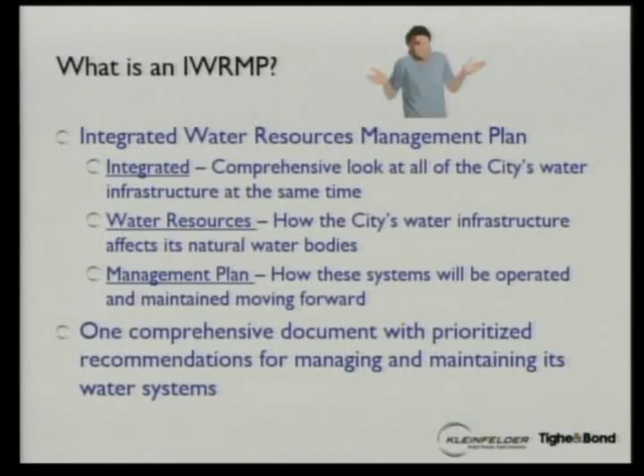So the water resources - again it's water infrastructure, but we're also looking at what are the critical natural water resources in the city, and a management plan. So this plan is going to lay out long-term maintenance, management, and capital projections for these three systems. That's really the goal. We'll summarize this in one comprehensive document. It'll essentially be a living document, a living capital plan that will need to be updated every so often, but it will be comprehensive. That's the key.

So what are the steps? Really, the top level steps are understanding the natural environment - what are the water resources - versus the built environment. What's the city's planning documents? What's the zoning look like? What's the commercial versus industrial versus residential mix, and in what areas? We need to understand that.

So we've done a lot of research and summarizing that - a needs analysis. We'll look at these systems and, based on certain factors, determine what they need. There's a lot of different factors. It's not just condition - condition's the obvious one in the room, but there's a lot of different competing factors that build into a needs analysis.

And once we understand the needs, we'll look at different alternatives for addressing those needs, ultimately coming up with recommendations that are integrated into a capital improvement plan. So I'll pause there for a second - that's a lot to take in, and I went through it pretty quickly. Are there any questions?

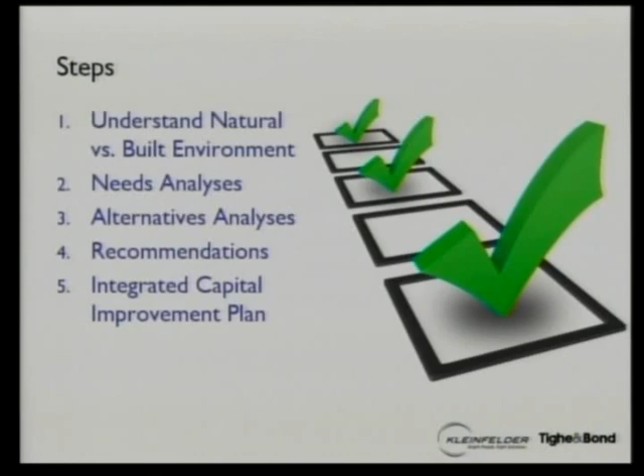Is there any... most of the eye contact I'm getting is pretty good and pretty positive, getting some head shakes, but if there are any misunderstandings or clarifications, now would be a good time. Nobody wants to go first, and that's fine.

Again, we'll be available to answer questions at the end. So, public participation - I do definitely appreciate everyone that is here tonight. It's a key part of this process.

As we're getting into the whole planning of this, in terms of scoping it with Joe, working with Joe several years ago, quite honestly thinking about this project and who it would affect and what it would entail - it's a pretty aggressive task, trying to incorporate all the different groups. We listed out all the groups that we felt might want to have some sort of input into this process, and it's a pretty long list.

And again, in order for this project to be successful long term, it's important that we raise the public awareness of what these needs are. Because at the end of the day, it's going to come down to spending money and how it's being spent. The more we can do to raise public awareness and understanding about that, the more successful ultimately the project will be.

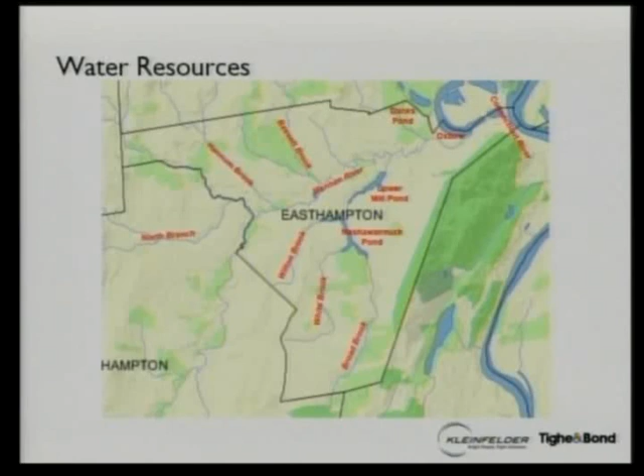Go ahead, Dave. And there's known water quality issues in many of these streams. That's no different than most towns across the state. And there's categories, so we're aware of those. That's kind of our first level of review, basically a desktop data review.

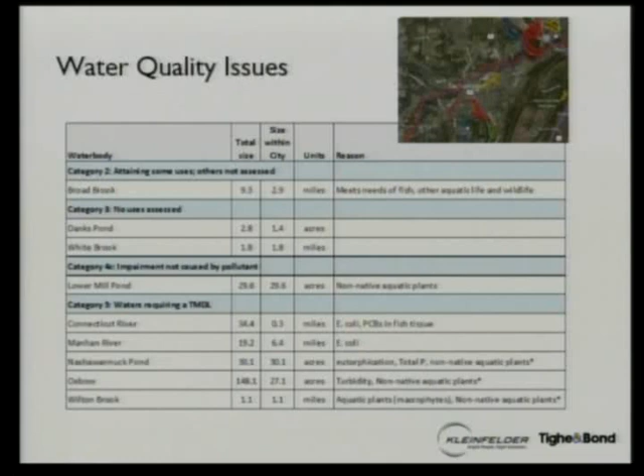When we get into the stormwater piece, we're going to look at watershed management and really look at each catchment area and prioritize those catchment areas. The priority is going to be based on the level of contamination or potential contamination in those areas. That'll end up driving what we do in the stormwater piece, but these are just some of the things we definitely need to take into consideration when putting together this prioritized capital improvement plan.

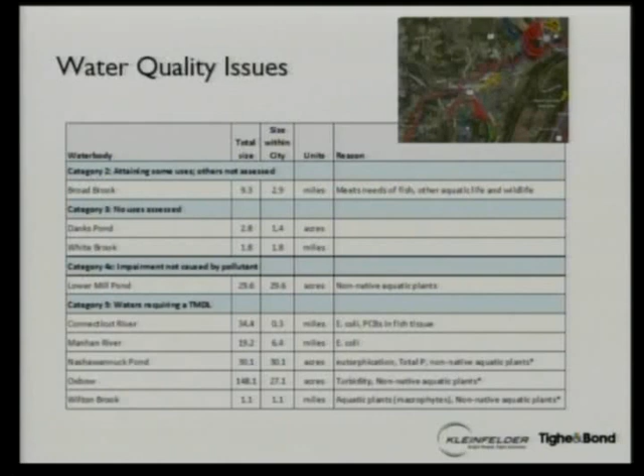Some of these areas that are impaired are going to get priority over other areas. And really the most critical natural water resource in the area is the Barnes Aquifer.

In terms of protecting the aquifer and prioritizing the improvements to continue to protect it, the aquifer certainly has a pretty established support group, and we'd like to involve them and continue to work with them to support this project, because the aquifer is a regional water supply for 3 communities, plus Holyoke has a number of private wells on the aquifer as well.

So 60,000 residents are getting drinking water from the Barnes Aquifer. And there's a number of contamination threats between underground storage tanks, hazardous materials, sewer overflows, septic systems, road maintenance, and hazardous waste. There's a lot of potential contaminants out there. So we're definitely keeping the Barnes Aquifer high on our list of critical natural resources.

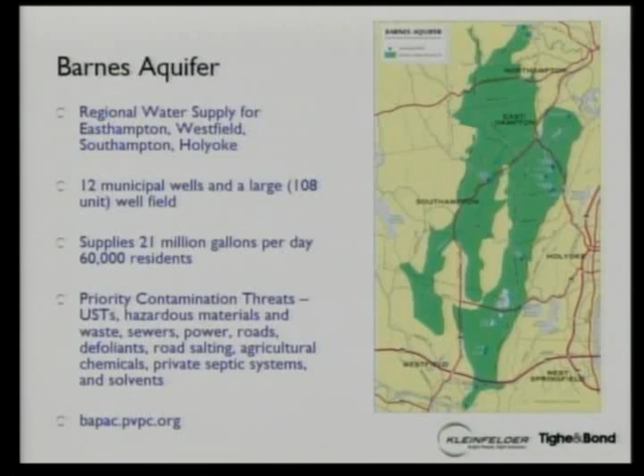So I get to stop talking now. Dave Peeling's going to talk about the drinking water system. Now's a little break. We're going to go through the drinking water system, the wastewater system, and the stormwater system. If you have questions, I'll take them now, or we can continue.

Just one comment. As far as the drinking water system goes, the last time we did a water management plan for the water system was like 1985. So that plan has been obsolete for many, many years. Yeah, those dates I threw out were just arbitrary.

All right, thanks a lot. I'm Dave Peeling again, and I'm going to lead off here. We're going to shift gears just a bit, like Neil mentioned, and talk a little bit about infrastructure now and what the city of Easthampton owns.

You hear about infrastructure nationally and how there's so much aging infrastructure and the amount of investment that's going to be required around the corner, all around the country. And Easthampton's in the same boat. You own a lot of valuable assets. You have a lot of infrastructure out there.

Part of our goal here is to figure out from many different angles how to address infrastructure needs proactively and in a way that's supportive of your natural resources and reflects the values of the community as far as what's prioritized and how projects interplay. As we go forward into future workshops, we want to talk more specifically about some of those things.

But what we thought we'd do tonight for this infrastructure portion is at least go through a little spin through the city here and show you what assets you have in your various utility systems, so everyone starts from the same place and has a good understanding of what infrastructure is out there.

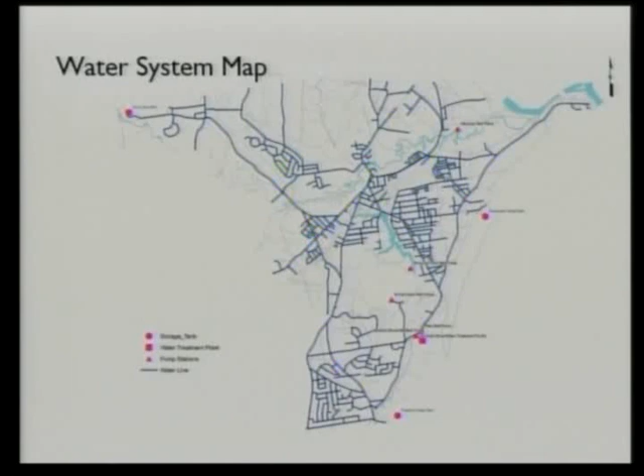Those represent either a water supply, the little triangles, or one of your groundwater wells. Your sources all come from your groundwater. There are 3 tanks that are circles in each of the 3 corners of the city, and then there's a treatment facility along with some wells down in the lower right corner. But you can get a sense of the coverage and the extent of the water system covering the full city.

So as far as getting into this project, what are some of the priorities, some of the drivers for us as we look at the water infrastructure?

First, you are very fortunate to have very high quality water here. In fact, just this year, you won a national award for the best tasting water in the United States. Massachusetts was represented by East Hampton, and Massachusetts was the winner down in Washington, D.C. So that's not a small thing.

There are a lot of systems where they really have aesthetic challenges, poor water quality that people really put up with. So you have a good thing, and we want to protect a good thing. Do no harm first, right?

We want to look ahead for your city and see what you need in the future. Is the city growing? Is major business leaving? What's the right number? What sort of supply are we trying to meet in the future? Right now, about 2 million gallons a day of water, approximately on an average day, are supplied to the city. That can close to double on a max day, up to 3.5 million gallons supplied to all the residents and businesses in the city. So that's where you are today.

Is it going to look the same 20, 30 years from now? We want to be sure that the water system remains reliable, from all aspects. That goes from maintaining a reliable resource, so nothing's overdrawn where you start losing that reliability, and that the infrastructure itself remains reliable and has redundancy, so all the city residents depending on their drinking water can be assured that it will keep being delivered regardless. And we also want to look at things like fire protection.

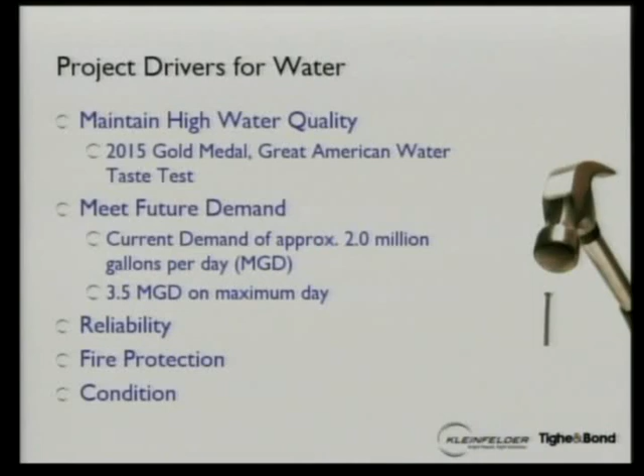All the fire protection in the city is through your water system. And we also want to look at just the condition of the assets and make sure, as things are deteriorating, we understand that, and we can prioritize things correctly. So those are some of the drivers as we looked at all the assets in the system.

So here we're going to do a little tour now of your system, in case you don't know all the assets. A main focus of the water system is the Hendrick Street well and treatment facilities.

Most recently, you have a nice facility there that was constructed in 1995, so it's still relatively new. You have a treatment system there, which is aeration, just applying air to remove some contaminants and get the water to full good quality with a little bit of chlorine dosed at that facility. You've got offices, a laboratory, garage, a couple different things all at this location.

And actually, there's 3 separate buildings. There's the pump station that withdraws the water and sends it over to the treatment facility itself, that includes the lab and garage, and also a cold storage building on the site. So those all together make up the system.

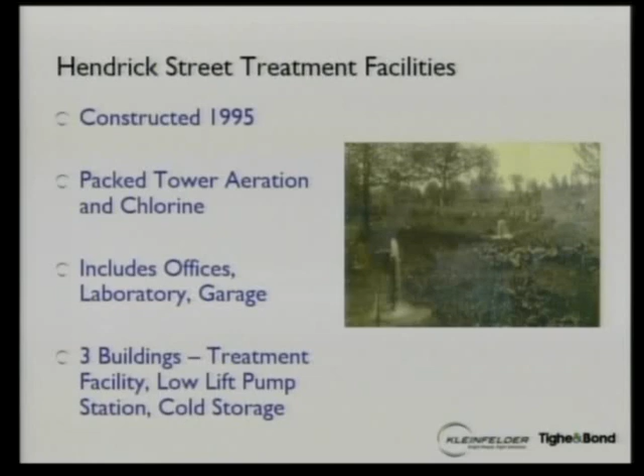And I pulled that picture off of Jim's wall yesterday, just showing how far back this supply goes. Even though your new facility is 1995, this goes back to, I think, 1908 is the time frame. I don't know when that picture was taken, but you can see some of the wells being put in the ground, and they actually are flowing up through the well. So again, kind of blessed to have that type of water supply in town here.

So if we move on, here are some pictures of the facility. That top left is the pump station that houses the pumps that withdraw the water and send it over to the treatment building, which is the lower left. You can see the size of that. You can sort of see the garage bays through the light there on the screen, but that is sort of a main facility. And then that picture on the right there shows the tower where the treatment of the drinking water at this facility takes place.

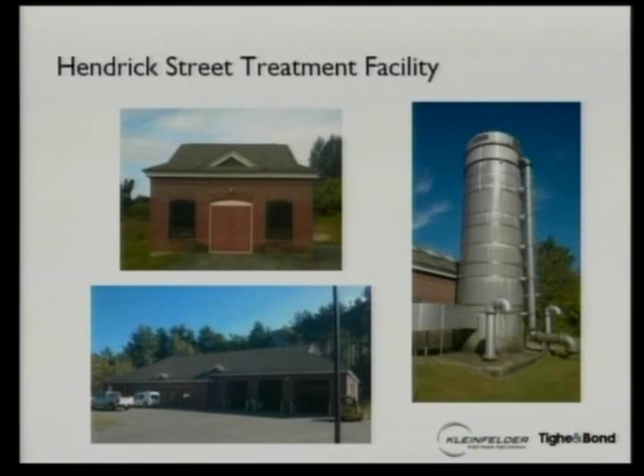So you can see it has some weathering and deterioration over time. That's the type of thing we want to look out for before we lose a valuable asset like this. What do we need to do to protect it, if it makes sense and fits into an overall long-term plan? That type of comparison shows you have some old infrastructure, and things do start to deteriorate over time.

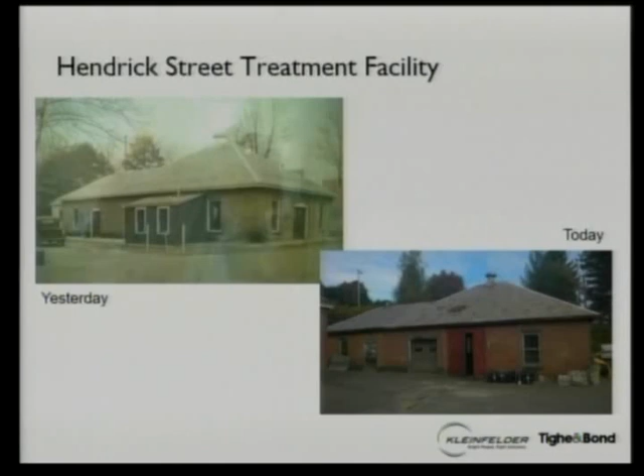Aside from the Hendrick Street site, as far as supplies and sources in your water system, you have a total of 5 pump stations, counting Hendrick Street. That first picture we saw is one of those 5. Four of those 5 have had some sort of update in the last 20 years, so as far as infrastructure goes, that's relatively recent work on those facilities.

There's one source that's inactive because of some aesthetic concerns with the water quality it produces. That remains more of a backup role, and you're able to meet demand pretty easily with your remaining sources. All of those wells and the associated pump stations have a capacity of at least 1 million gallons per day, so based on 2 million gallons a day as your average day, you have plenty of wells at this point to meet your demand.

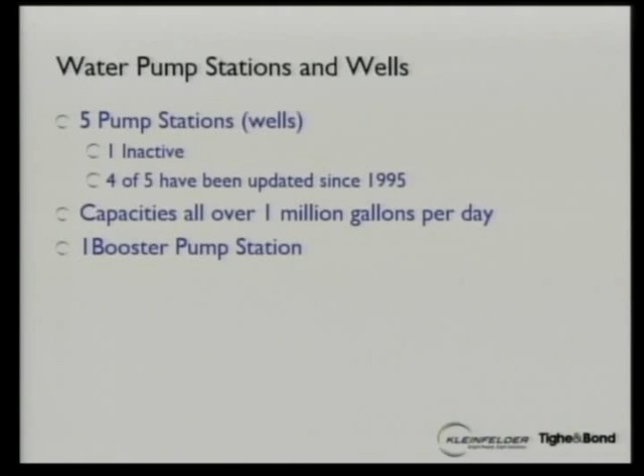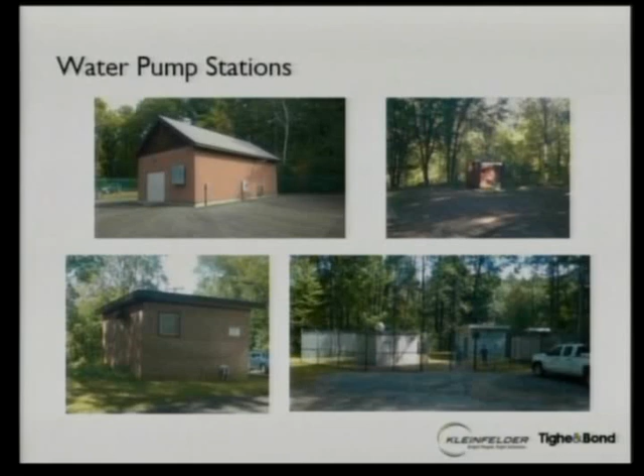There's also one booster station out in town, and those are just some photos of what they look like. You can see nice looking utility buildings, all in pretty good condition, with a few older components as part of the facility, but overall that's what they look like. The Brook Street pump station is the upper left, Pines is the upper right, one called Moroni is the lower left - that's the one that's inactive currently. And then your award-winning source, Nonotuck wells, are the lower right.

So then the third piece of a water system are the storage tanks around town. You have 3 tanks, you may or may not have seen those around town. One is inactive right now, located on Mount Tom. That had some leakage issues and some associated water quality concerns, so for the time being that has been drained and is offline.

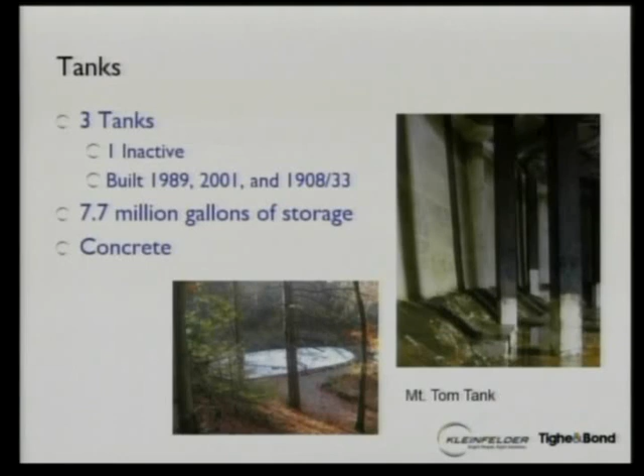If you combine all 3 of those tanks together, it's a little over 7.7 million gallons of storage available, and all the tanks are concrete tanks, which are a good durable type of material for tanks. Those are just pictures of your other 2, Drury Lane and Peaceful Valley tanks.

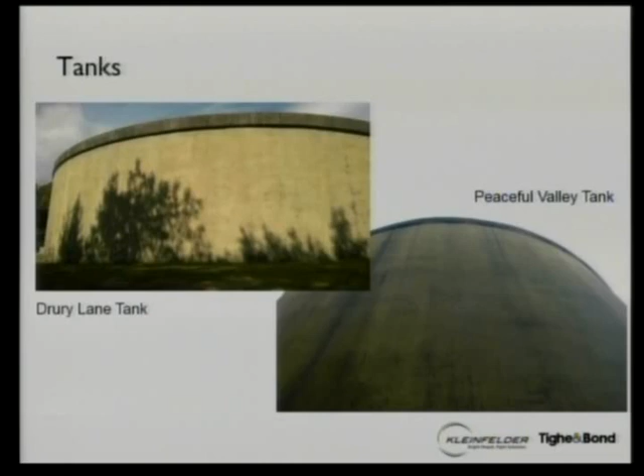The last piece of your system, but certainly not least, is the water mains that distribute the drinking water throughout the city. It's actually 130 miles of water main out there, serving about 5,800 service connections - those are the points where the water gets withdrawn off the water main and brought into either a home or an industry. If you add up how many people live in the different residences that have those service connections, it's 16,000 people who are served by your water system every day of the year.

There's also one small pressure zone in the city, so most of the city operates on the same pressure off of the tanks, and based on your elevation, you might have higher or lower pressure. There's one portion where the elevation is just so high, there's an extra pump to push and make sure you've got good pressure in everyone's homes in that area.

So where is that? That's located in, is it Pomeroy? Is that the street? Is it?

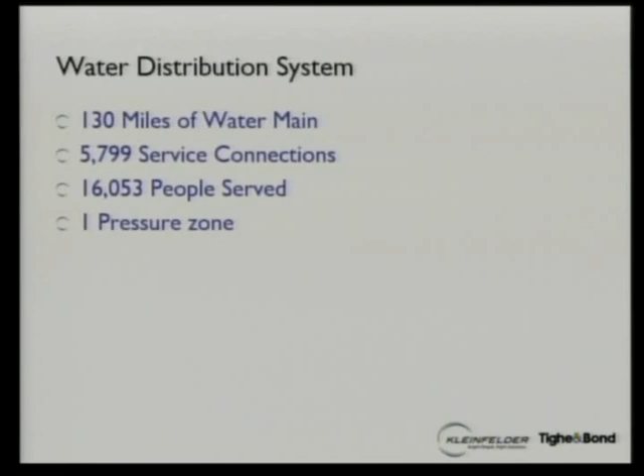So our tasks for the water system: we wanted to assess the condition of all those assets, see what's out there, see if anything's broken, needs fixing. We want to look ahead at what is needed in the future and how to best meet those needs. Those needs may not require more pumping - maybe it's just conservation or making sure we are protecting our resources, and that's the priority as opposed to just pumping more. That's part of the examination we'll do as part of this project.

We want to look at operations, make sure that everything is running as efficiently and cost effectively as possible, and meets the new regulations. There are always more regulations coming, especially on drinking water systems that can be a little burdensome. So that's going to be examined as part of the process.

Making sure energy use of the facilities is efficient, because running large pumps is a major use of power supply in any city, and you're no exception here. So if you can find ways to be efficient in your energy use, that can really save some operating cost.

We're going to do some modeling of your water system, tanks, wells, the whole thing, to determine points of potential risk in the distribution system. You might have leak or fire protection issues, or there might be lower pressure, and that might help us decide where to focus any projects to upgrade portions of the water system.

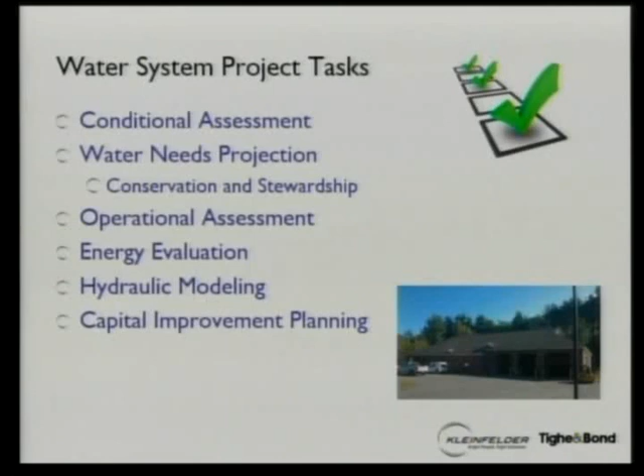And then we'll take all those pieces and build it together into an overall capital improvement plan, focusing on infrastructure, but hopefully reflecting all the values that have gone into this overall water resources management. And I think with that, I'm going to turn it over to Dave, who's going to talk a little bit about wastewater. Thanks, Dave.

Similar to the water system, the city owns, operates, and maintains a wastewater collection and treatment facility. I'm going to be providing a brief description of the different facilities related to the wastewater system, talking about the project drivers related to it, and then briefly discussing some of the tasks we're performing, similar to what Dave talked about, to address some of the concerns related to the wastewater system.

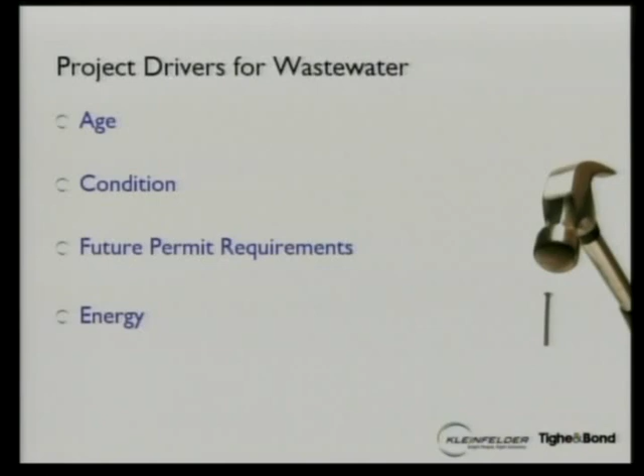And then lastly, energy, because many of the components of the facility are getting old, some of the equipment is less energy efficient than the more modern equipment that's available. So we'll be looking at where energy improvements might be appropriate in order to save operating costs.

So with that, I'd like to talk about some of the wastewater system components. The first being the wastewater treatment facility. The wastewater treatment facility was originally constructed in 1949.

At that time, there was a control building and some settling tanks. The facility was significantly upgraded in the 1970s to improve treatment, and many buildings were added to the treatment facility and tankage in order to improve treatment.

There were also a couple of upgrades performed in 1987 and then in 1996, but those upgrades were a little bit less significant. But there hasn't been a major upgrade to the treatment plant since 1996.

The treatment facility currently includes 5 process and control buildings and 12 large concrete structures that are all used to treat the wastewater flow. There's numerous equipment at the facility, including pumps, mixers, grinders, and conveyors—a whole host of equipment necessary to treat the wastewater flow. Really, the takeaway here is that the wastewater treatment facility is a very significant asset for the city that needs to be preserved.

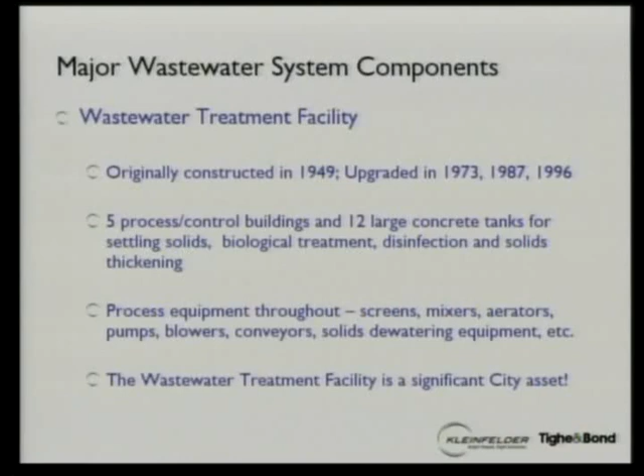These are just a couple of photos of the wastewater treatment facility. The photo to the left is an aerial view, again highlighting the fact that there are several components to the facility. The photo to the right shows one of the process buildings at the treatment facility and some process tankage in the foreground.

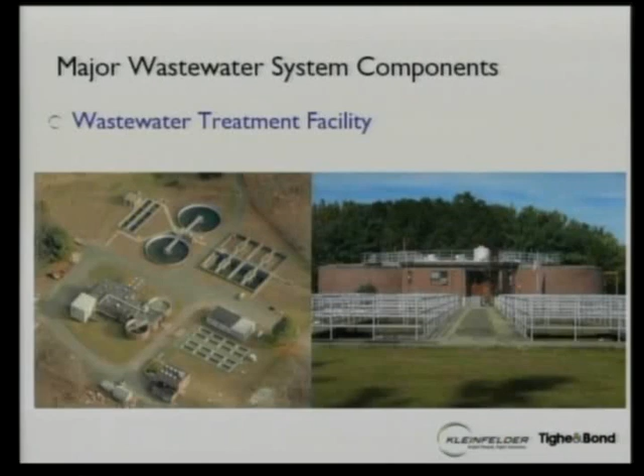One of the more significant concerns at the wastewater treatment facility is that they see very significant increases in flow in the springtime and when it rains. We believe these increases are related to leaky pipes within the collection system that allow groundwater to get in, and because groundwater is higher in springtime, flow increases during that period. We also believe there are direct sources of clean water flow entering the sewer system, possibly from catch basins or roof leaders or roof drains that are directly connected to the sewer system rather than the stormwater system.

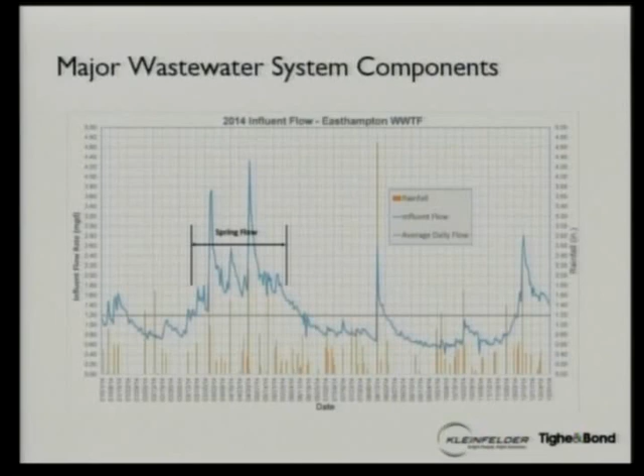As part of the project, we'll be looking for those sources of clean water flow so that we can eliminate them. Clean water flow is a concern because it takes up capacity within the collection system that could be used to convey more sewage. It takes up capacity at the pump stations and at the treatment facility, and the city pays money to pump and treat this clean water flow.

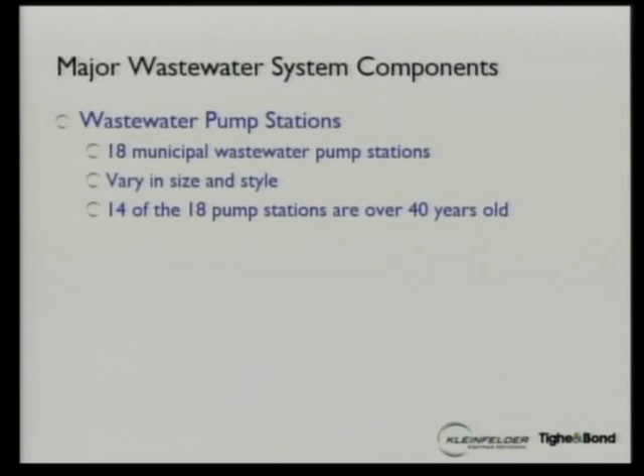Next, I'd like to talk about the pump stations. As I mentioned earlier, there are 18 municipal wastewater pump stations within the city. They vary in size and type—some very large facilities serve large neighborhoods or areas, while some small pump stations serve just a handful of homes or just one street. Many of the pump stations are relatively old; 14 of the 18 are over 40 years old.

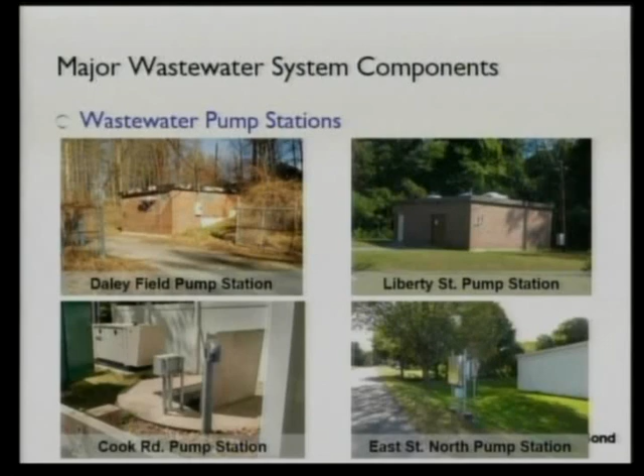Next, I'd like to talk about the collection system. As I mentioned earlier, there's about 70 miles of mainline sewers within the collection system. In addition, the city owns some of the sewer service piping—the piping that runs from buildings in town to the sewer main out in the street. The city owns the portion from the property line to the main, about 35 miles of that piping. There are also pressure pipes within the system that convey the flow discharged from the pump stations to the gravity portion of the system. We presented a map showing the age of the collection system to illustrate that significant portions are quite old—in fact, about a third of the collection system is over 85 years old.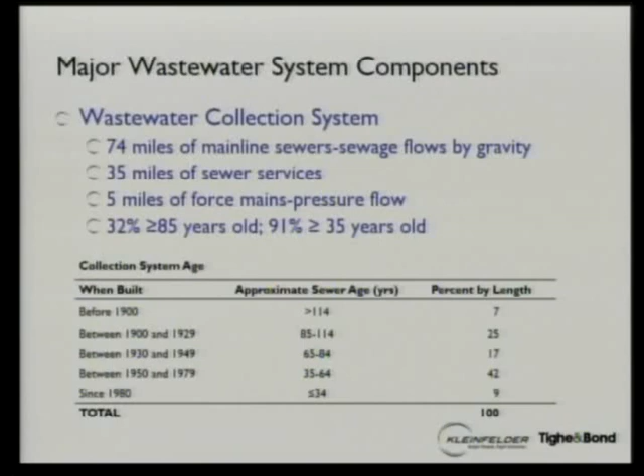So what are the tasks we're going to be performing to address some of these concerns? Similar to the water evaluation, we're going to be doing a condition assessment. We'll be visiting the wastewater treatment facility and all the pump stations to inventory the assets and determine where improvements are going to be needed over the next 20 years.

We're also going to be looking at the collection system and developing a condition assessment for that. That will be a more targeted assessment, and that work is planned for the spring of 2016.

For the treatment facility and pump stations, we've already visited those facilities and are evaluating the data we've collected. Because there are a number of pump stations in the city, we're looking at trying to eliminate a few of them as part of the project. There are some locations where, based on information we have in the collection system and pump stations, it looks like elimination may be feasible. So we're looking at that as part of the project.

Similar to the water evaluation, we're also doing an energy audit to identify the largest energy users within the wastewater collection system. Once we determine that, we're trying to determine whether it's appropriate to make some improvements to those facilities in order to reduce operating costs.

We're also evaluating the processes of the wastewater treatment facility, especially in light of the fact that we expect there could be some new permit limits coming in the future. The evaluation will also reflect the fact that there could be some changes in users as time goes on. And then lastly, we'll be looking for those sources of clean water flow.

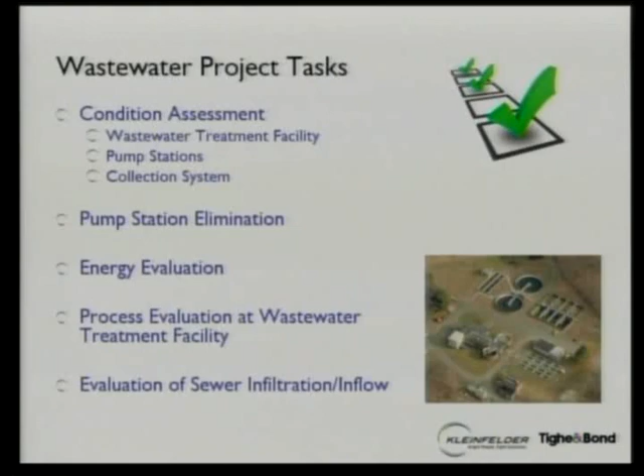Can you clarify where the ultimate outflow of all this is? Excellent question - post-treatment? So there are actually two outfalls from the wastewater treatment facility. The primary outfall runs through a 2-mile pipe from the plant to the Connecticut River. However, when flows get high, that pipe can't handle all the flow, so a small portion also goes out to the Manhan River, which is essentially next to the treatment facility.

So yeah, you see the triangle - you can kind of see it. So here's the treatment facility up here, and there's a pipe that runs from that point all the way to here.

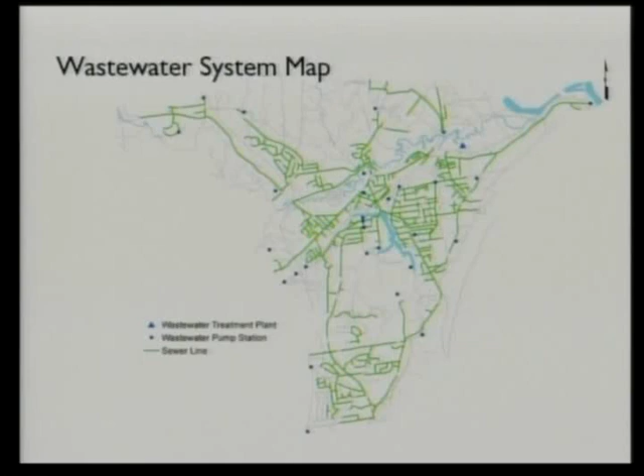That was it, Dave. And again, the last time there was a facilities plan done for the wastewater treatment plant was in the mid-90s, so again, that's something that's obsolete.

So the stormwater system - it's definitely a different animal than the water and wastewater systems. So what are the drivers for stormwater? I think it's important to jump right into this - really the obvious one is improving water quality. Stormwater has been shown to be the largest polluter of our water resources.

EPA tackled wastewater treatment in the 70s and into the 80s, and really got wastewater discharges and industrial discharges cleaned up. And now the focus is on stormwater. They've realized that a lot of these water bodies they expected to be cleaner aren't, and really the focus has moved on to stormwater.

So the stormwater systems are permitted under the NPDES MS4 - again, we live in a world of acronyms here, right? It's a National Pollutant Discharge Elimination System, and MS4 is a municipal separate stormwater sewer system. There's another S in there somewhere, but basically it's a large acronym for saying urban stormwater systems.

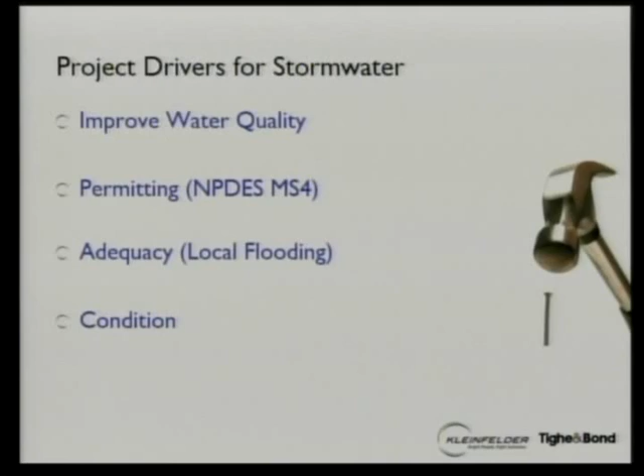Do we have any combined sewers? No, there's no combined sewers. What you might hear is a term SSO or CSO, which is combined sewers. I don't think we've ever had combined sewers, or maybe the system was separated a while ago.

So again, what all this really shows is that the system's pretty extensive. I think what you've seen on the water and wastewater, and what's really meant to be shown by these graphics, is that it's a pretty built-out system. The water and wastewater serves almost the entire community, and the stormwater system is similarly extensive throughout the city.

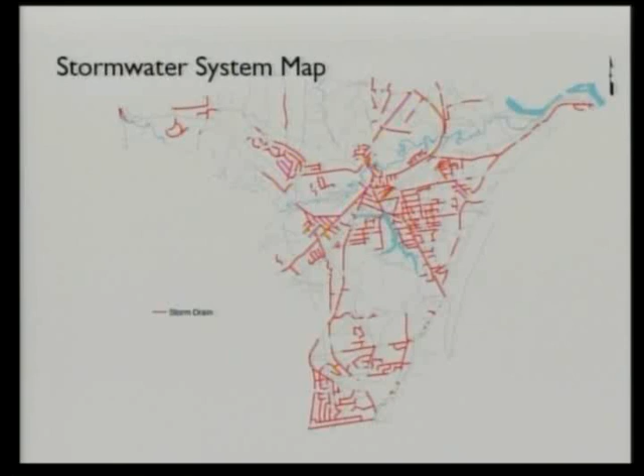I don't have the exact numbers, but we're looking at not only pipes, but swales and culverts - box culverts, arch culverts, open bottom culverts. We're really looking at crossings, whether it's crossing a rail line or a street. There's a lot of catch basins, a lot of manholes.

We have newly installed water quality structures, which nobody really knows how to maintain, and they're somewhat effective - some better than others, but they're newer type structures. And outfalls - there's a number of them, I forget the exact number. I don't have it included here, but the city is ahead of the curve on outfalls. They did a full inspection of all the outfalls.

Probably, what was it, 2009, I think? 2001. Time flies. Sorry, 2001. Geez, it does fly, Jim.

So certainly addressing outfalls and discharges from outfalls is a big focus of the stormwater program. Retention and detention basins - all these developments, whether residential or commercial, have to control stormwater through some sort of retention or detention. So how those systems are being managed and maintained is critical.

What we found is a lot of them aren't being maintained or managed, and they're not doing what they're supposed to be doing. The streets themselves - look at de-icing practices, salt and sand, how often the streets are swept, and what type of materials you're laying down on the roads has a big effect on stormwater runoff and the quality of that runoff.

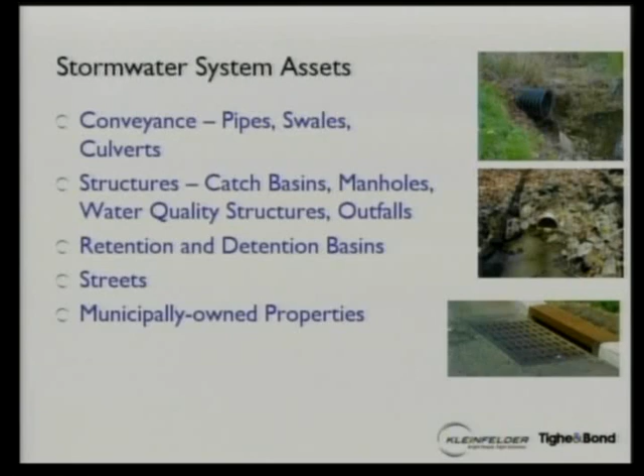Certainly some of those properties are permitted by the state because they have hazardous materials or function as industrial facilities, like the treatment plant. The treatment plant has a managed plan for stormwater, but not all municipal facilities do. So part of what the permitting wants us to look at is all municipally owned properties - it's called a good housekeeping measure.

So again, the tasks are a little different. The water and wastewater kind of follow a prescriptive program, looking at the drivers, the needs, and condition assessment. The stormwater falls a little differently - basically the tasks are laid out to address the permit requirements.

These permit requirements are coming. There's a draft permit for the state of Massachusetts that's been in draft for a number of years now. It's gone through different iterations, but I think the latest we're anticipating is that this spring the permit would become effective. We've been tracking it, and a lot of the things haven't changed in the drafts. So our tasks are focused around addressing those permit requirements as opposed to a traditional facilities plan process.

So a couple of the big ones I've highlighted are illicit discharge detection and elimination, which is really focused on sampling outfalls, finding sources of pollution, and correcting those sources. That's what the IDDE acronym - sorry, another acronym - really addresses.

That's where we'll look at the different watersheds and prioritize them, focusing sampling based on priority. Pollution prevention and good housekeeping refers to the municipally owned assets and really auditing all of those assets.

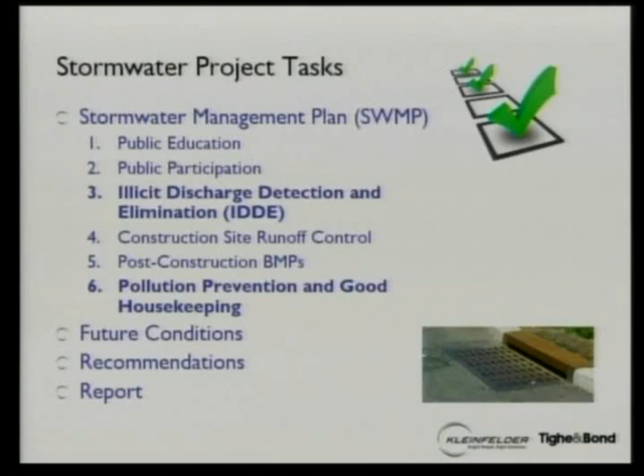Did I put you to sleep with it? Oh, a little bit. So again, overall project status.

So now shifting away from stormwater and back into the overall project. Dave, I don't know if you want to address this - I think you're probably a little closer to it than I am, so I'll let you tackle it. This is, again, the stormwater piece. I don't know if there are any questions on the stormwater before we move on. No? Okay.

Just to wrap up, now that we've gone through the infrastructure a little bit, let you know where we stand on the project and where we're heading in general terms. Overall, we started the initial phases back in April of this year, so we're already a few months in.

The initial phases of work focused on things like data gathering, meaning a combination of looking at what work has already been done, what's out there as far as the city's master plan and where the community wants to be in 20 years, data on what's going on with the wastewater plant, all that type of thing. You're fortunate to have a lot of staff at the city who are long-tenured, very experienced, and know a heck of a lot about these systems. Part of this project is trying to get that information into a form that can be passed on to the next generations of city staff, so that information isn't lost as people start to retire.

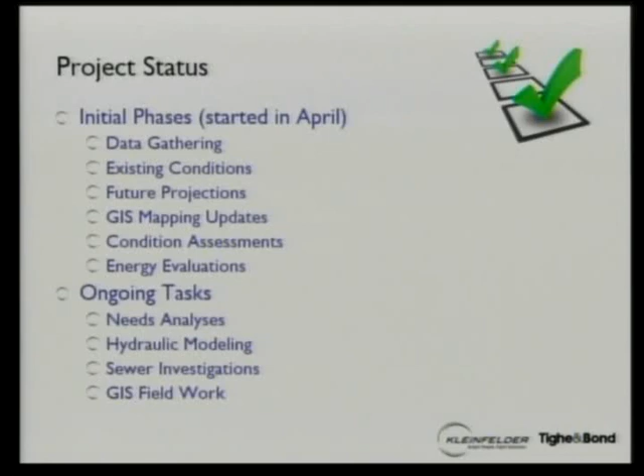So I guess next steps from here are just, we're very glad all of you took time out of your own time to come out and hear this tonight and learn a little bit about the project. We're hoping you remain involved in the project and give us your input, because that really is how this end product will hopefully best serve the city.

Going forward, as Neil mentioned, we have a more detailed workshop planned where we'll get into some real detail on what the condition assessment showed and what the needs analysis shows, why, some specifics on what that's all about, and getting some feedback on what people are responding to and what seems more important than another.

Then we'll get into a next phase later on, which would be alternatives analysis, where having identified the needs, we'll start to look at ways to address that need. One of the advantages of this integrated approach is we may be able to address the needs by doing things in other parts of your citywide system, maybe not directly related.

So maybe we don't need a bigger water pump station. Maybe all we need to do is change conservation. Or maybe there's some ways to address needs comprehensively as opposed to infrastructure focused. So we'll go through that process, present different alternatives, get people's response on what seems to make sense and be suitable. And then the final workshop would be the presentation of what we come up with as a team here and what the plan going forward looks like, giving everyone a final chance to see that and what that's all about.